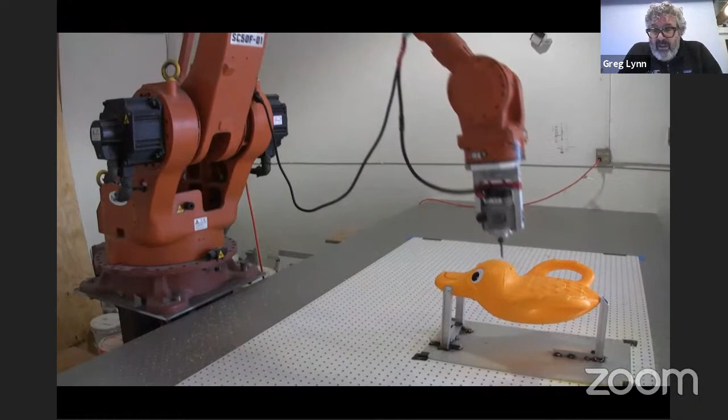Also, each one of these was intersected with another, and those shared curves of intersection were used to cut each piece with a CNC, a computer numerically controlled robot, so they would fit together. Then it was a very manual exercise of assembling all of these parts one by one.

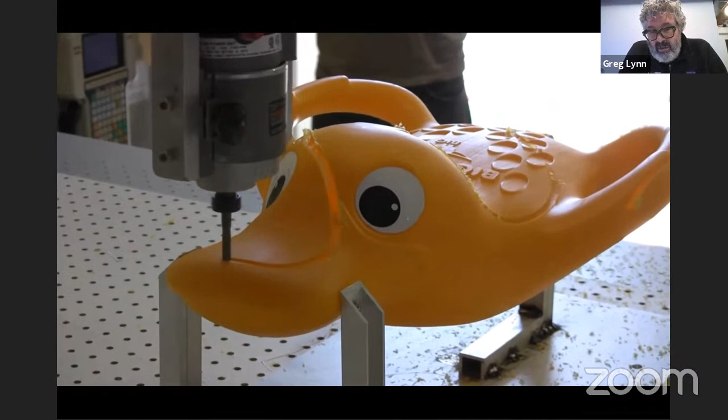My late father-in-law and my mother-in-law are both art historians. Irving Lavin, my late father-in-law, was a particular expert on Bernini. When I showed him the tables and furniture I designed, he said, oh, they have a spiral energy like Bernini's sculptures.

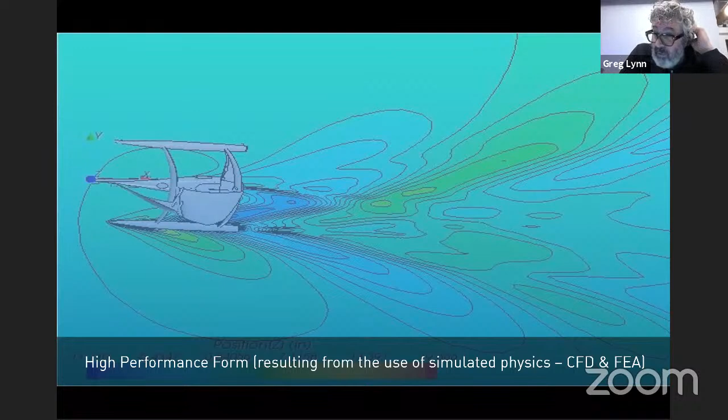What you see here is a simulation we did. It was very much like going back to the 1990s, where we would set up forces and let the computer, or actually a farm of computers, work overnight or sometimes even for a week or more, and then they would give us back results.

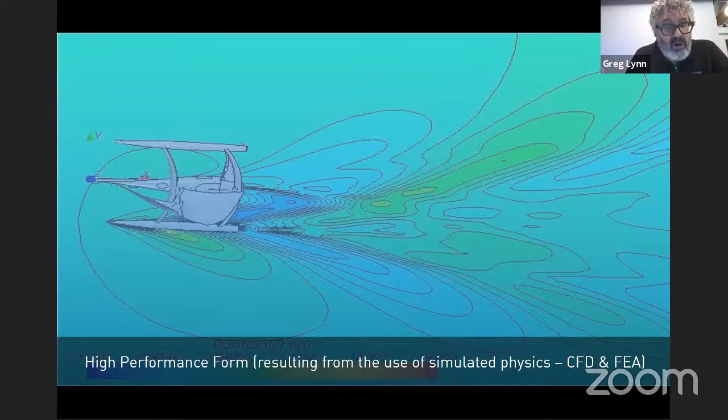This is showing a trimaran that I designed with Fred Karubla, moving through fluid, and those contours are showing the pressure in the water as it moves.

Here you can see a coupled simulation of air and water, where the white streamlines are showing the forces of wind moving over the sails, which are creating simulated drive in the boat. Then you can see the boat in the water, and where you see the red areas, that's where there's a very high pressure of water as the boat moves through it. And if you look at the curved line at the very bottom, that is a surface providing lift so that the boat slowly foils and lifts out of the water as it moves.

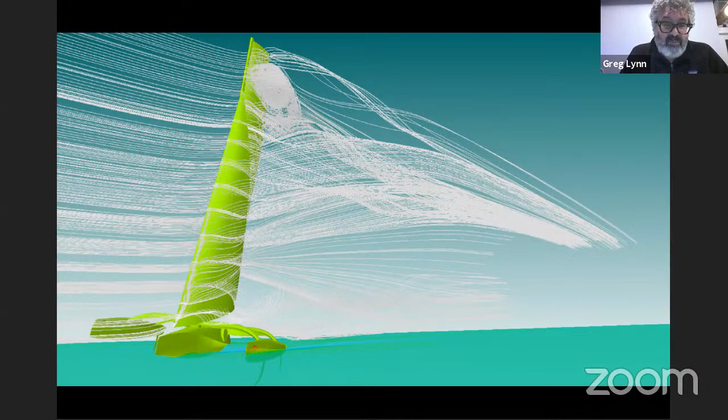So this method of motion is a completely simulated environment, where you can simulate force and form, so that the force of the wind and the buoyancy of the surfaces gives you feedback that helps you refine the performance of the object. So this is an animation of one of those simulations.

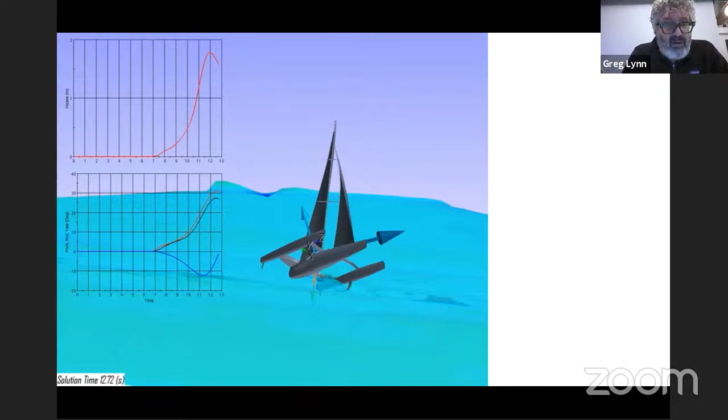In our simulation, there's nobody driving the boat, so almost every simulation ends in disaster of some form because nobody's correcting the boat as it moves. But it's telling us where we should place the foil fore and aft on the boat, where we want to produce that lift, and also where we want to position the sail and how much sail area we want fore and aft, so we know where the drive, the forward force, should be loaded. So this is a little bit showing a buoyancy study that we did.

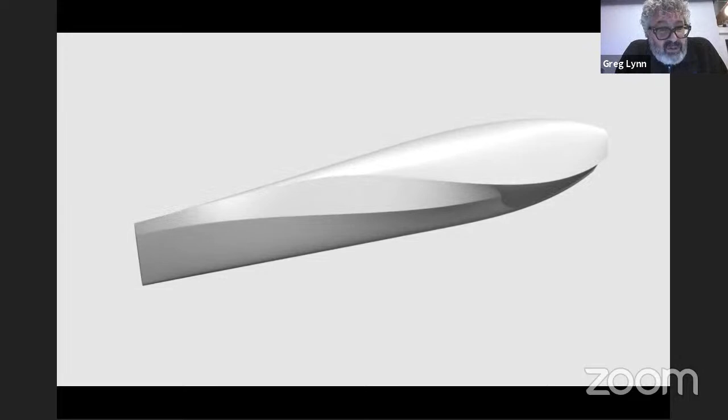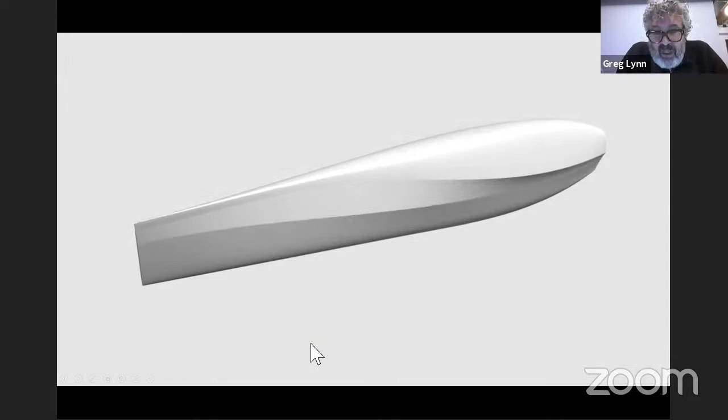I don't really think I could explain this perfectly over Zoom like this, I'd normally be pointing on the screen. But if you can see the mouse, you see a chine form here, which increases the volume of the hull in this upper section. You see a chine form in the back. Both of those lines are there so that as the boat flips over end, as the bow or nose of the boat goes down into the water, that crease...

So it looks like we have technical difficulties.

Yeah, it looks like it. It's amazing so far. Yeah, so far so good. We believe that he's reconnecting right now, so let's wait.

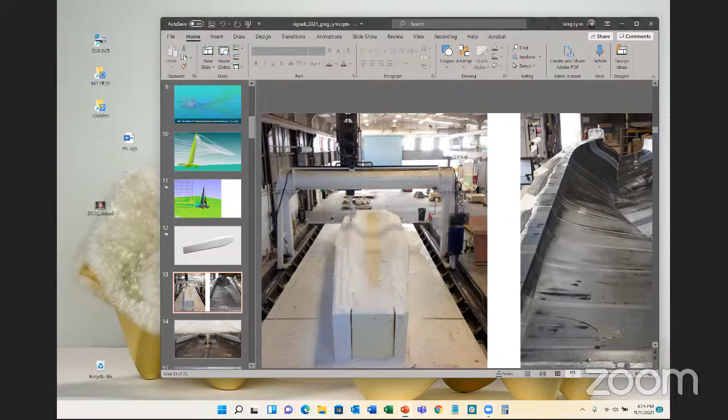All right, so, everything good with the screen again?

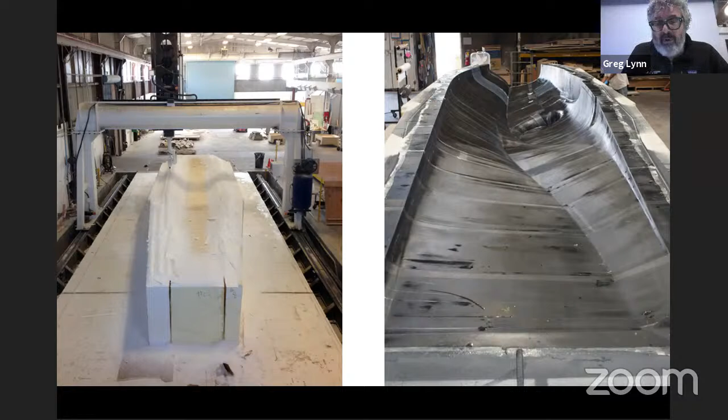Yes. Okay, so at any rate, what you see now is that same form on a giant CNC mill being shaped in foam as a mold on the left. And on the right, you see those curved chines that I was pointing out on the animation. This is how the boat was manufactured, with a robotically controlled mill that would carve the form, and then manually the carbon was laid up.

So all of that would have only been possible to design using that finite element analysis, which gives us insight into how...

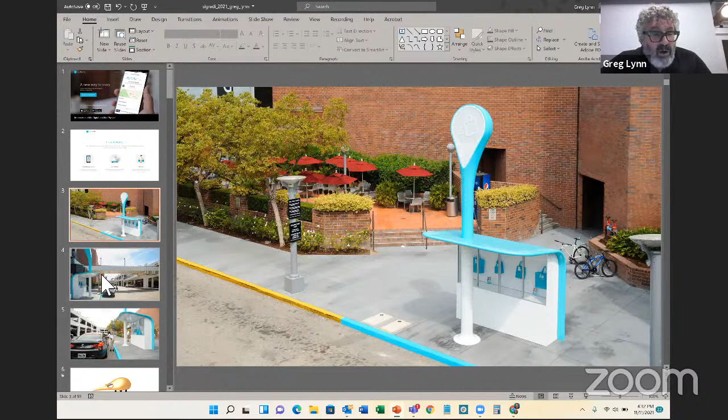Unlike Amazon, where you shopped on your phone and had things delivered, Curbside would record the inventory of an entire shopping mall, a Target, or a CVS, and you could buy the product, as you'll see here. A picker would get the order, go inside the store, pick your product, and then bring it out to this pickup location where a car would drive up and the picker would bring it out to the car.

This is shown at a shopping mall in Glendale, California. What's important about it is that the landmark, the curbside pavilion, had in the top of the mast a very high frequency Bluetooth antenna and Wi-Fi, and it would be able to detect when you were within a kilometer of the location.

Once you got within a few hundred meters, it would turn on the Bluetooth on your phone, and they could predict exactly when you would drive up. So the average time of a transaction was somewhere around 13 seconds on average. This was a kind of marker and a piece of technology and a little piece of architecture, which was at the intersection of the digital and physical - the exchange of physical and digital commerce.

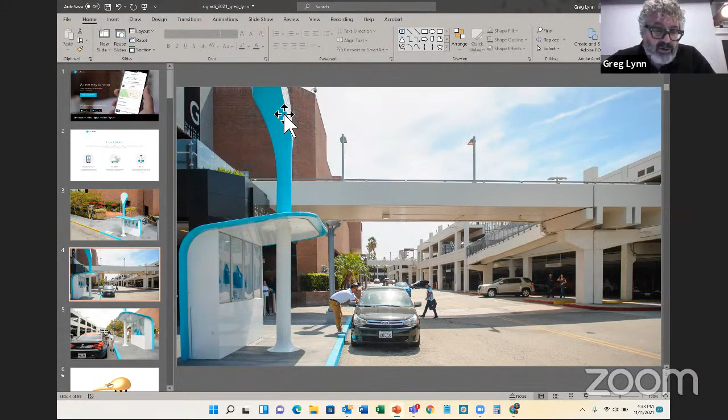In thinking about this, I learned a lot about how you literally connect an app with a building. In this case, the building doesn't move, but all of the geolocating and positioning within a mapped world was all happening between a physical structure and an app.

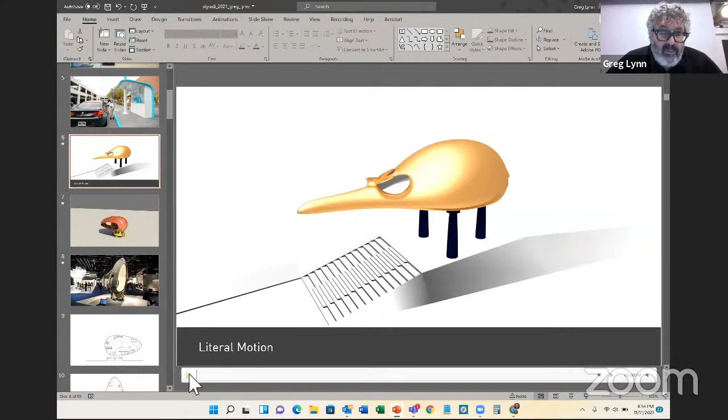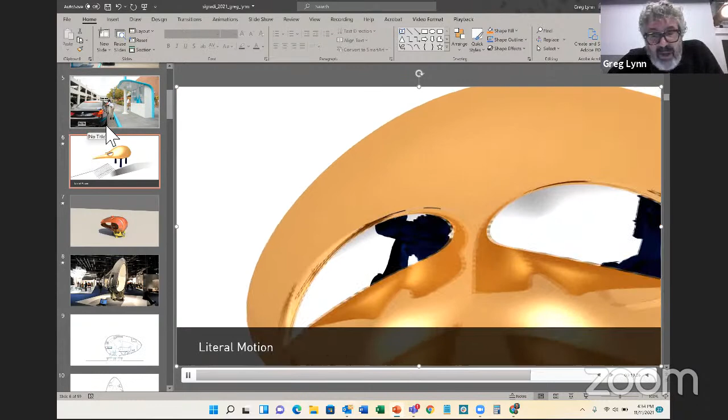A couple of years before, with Christian Moeller, we had entered the competition for the London Olympics, and Christian and I designed this moving pavilion, which was a carbon fiber dome. The proposal was for a carbon fiber dome that was rotated on a ring, and that ring was lifted up and down by 3 5-axis robot arms.

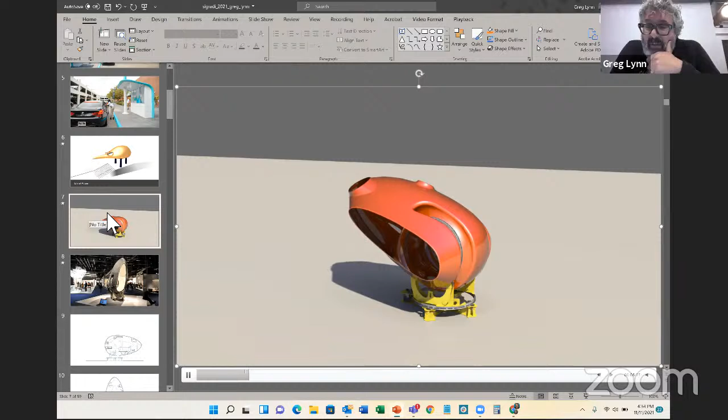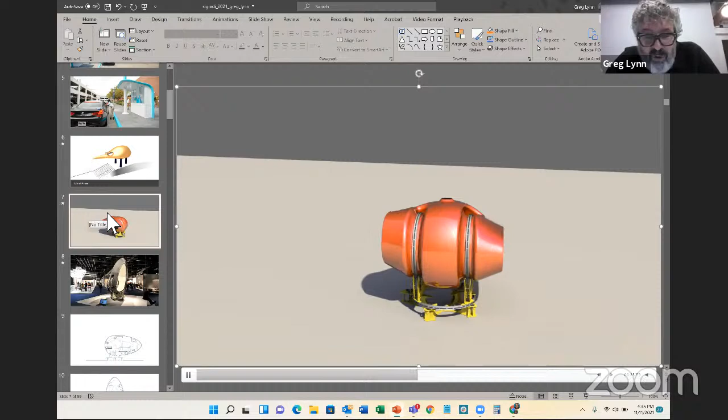So I went back to that idea of a building that moved, and for the Interieur Festival in Kortrijk, designed this tiny house that would be able to roll through 3 positions. You'd be able to occupy 3 surfaces of the house, and it would also be able to spin so you could change orientation. Everything you see in yellow was a simple little robot we designed to be able to move that domestic shell. Here you see at Kortrijk, kind of what we built.

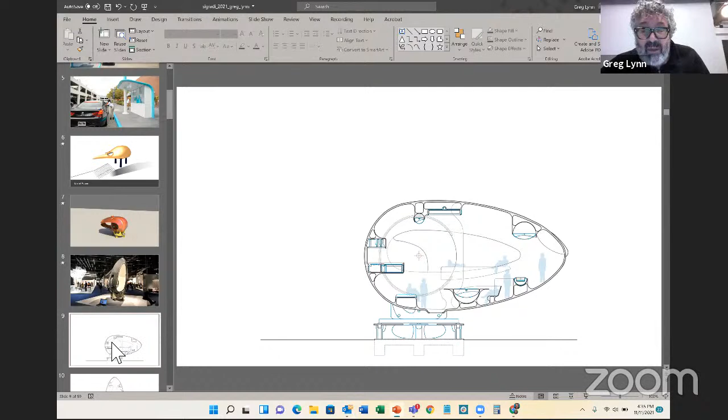This is a carbon fiber shell at 1/5 the size of the actual proposal. Everything you see on the base was the robot with the 3 motors, which would move it through all of its rotations. Here you see the different sections, a dining table and a couch in a living space, rotated here with the bathroom and the kitchen. And if you see, what was the table up here is now gimbaled.

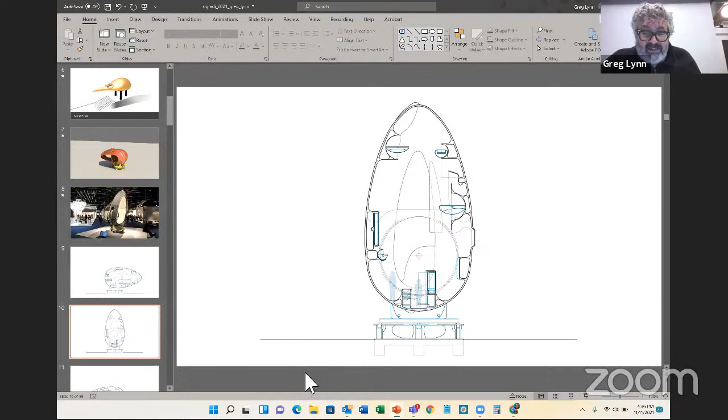So everything always stays level and appears and disappears. The top of this surface is a table and the bottom of it is a light. And then you can see it roll over for sleeping. Again, the robot at the base is what moves it.

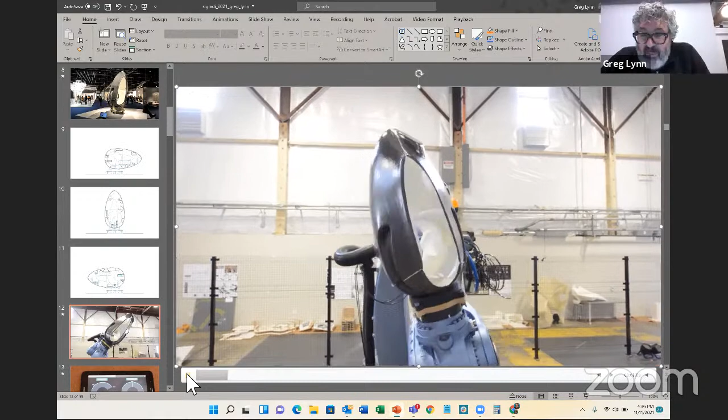So the first movement test we did was just putting it on a 5-axis robot and studying how the furniture would rotate and spin on the interior. You'll see the way all these pieces of furniture stay level all the time.

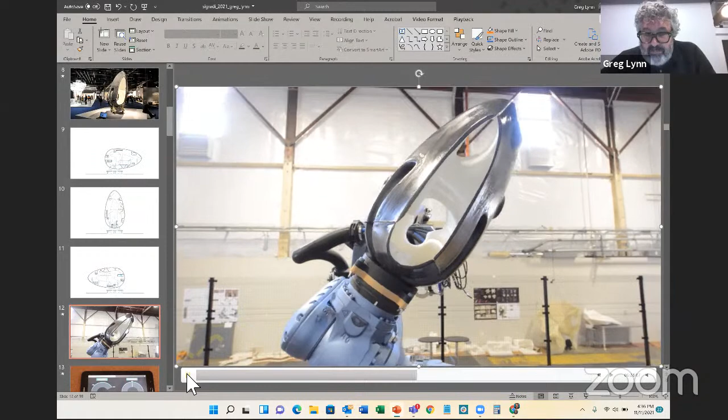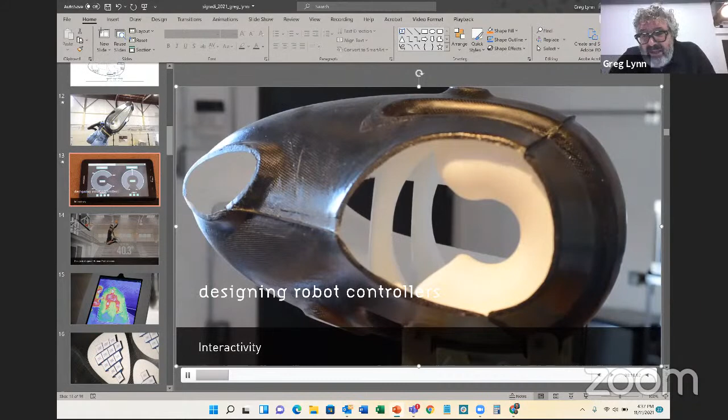And then here you'll see an app that we built to control that movement instead. So that was an app that we did that you could just download and immediately put the robot through all of those rotations, as well as having some preset positions that you could set it to.

And we wrote a very simple little piece of code that would control 2 of these motors and 2 axes, so that anybody could interact with the model.

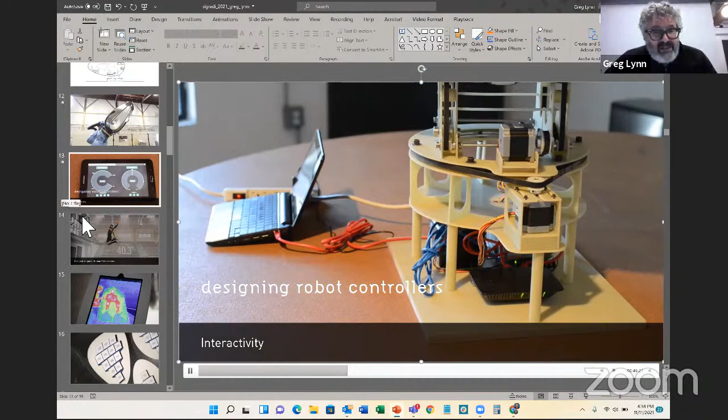This is a 1/25th scale model. That's a 1/25th scale model that's now actually at SF MoMA. So this connection of app to controller to machine was a next step in thinking about how physical things could move.

Soon, I think because of this project, I was approached by Nike to help them think about an intelligent piece of furniture, which could be controlled by an app. Here you see a photograph of LeBron James about to dunk a basketball. And the task for this chair was to give an athlete a competitive advantage by augmenting them with what we called a microclimate.

So we designed 2 generations of chair for Nike called the microclimate chairs. What they were there to do is, before a game, when LeBron James warms up, he's warmed up and ready to play. During the time between the warm up and when they tip the ball, it's several minutes, and during those several minutes, he cools down. Frankly, he's not able to perform at that level for 2 or 3 minutes into the first half of the game, and then 2 or 3 minutes into the second half.

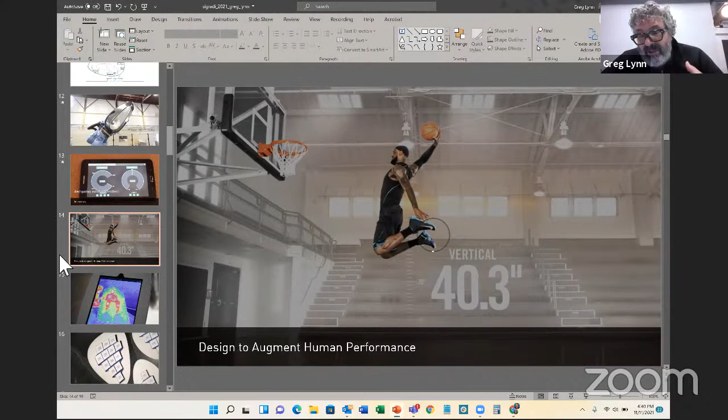So our job was to make a climate that would keep him warm and flexible and ready to play, so that for the first 2 minutes of a game, LeBron James would be able to perform, while all the other players who didn't have the microclimate chair would be at a disadvantage. The design of this microclimate was to give an athlete a higher performance.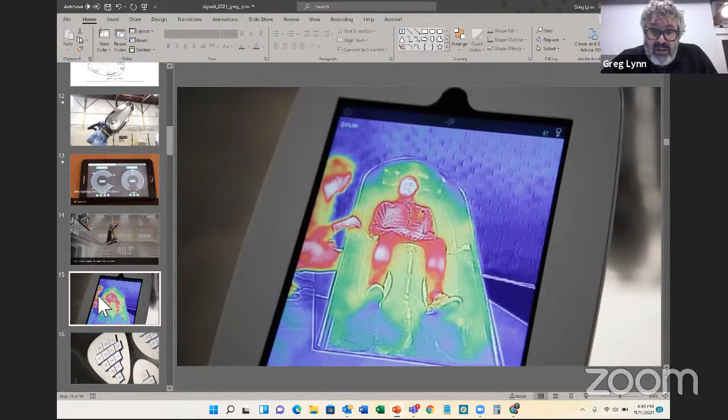Here you can see a photograph of the first generation of the chair using a FLIR heat camera, and you can see that different regions of the chair are at different temperatures. That's because we embedded a network of heating pads and a network of Peltier chips. The Peltier chips will either heat or cool on one side, depending on what electrical current you put through them, so we could heat and cool areas of the chair selectively to keep certain muscle groups hot and other areas cool. We also have an air channel that flows around the entire chair to blow cool air.

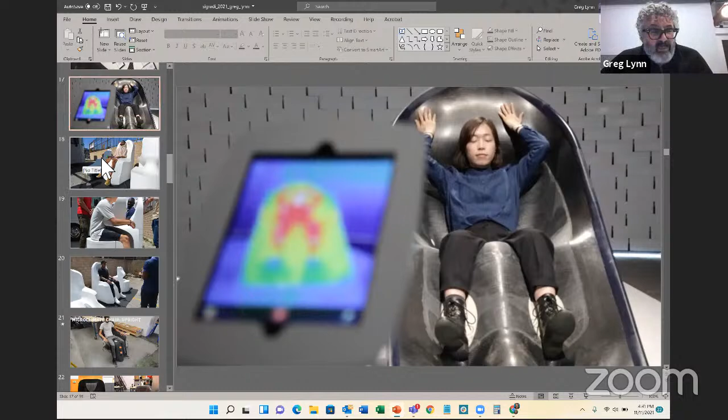In the second generation, you'll see we have more technology than that. So we got NBA athletes and tested them in different forms of the chair, trying to get as much of their body surface in contact with the chair as possible, and got feedback from the pro athletes on which positions they'd be comfortable in while on the bench or waiting for the game to start.

So here's the second generation of microclimate chair. You can see the patches of heating as well as the Peltiers. We built simple capacitive touch interfaces, so the athlete can selectively heat and cool the chair themselves.

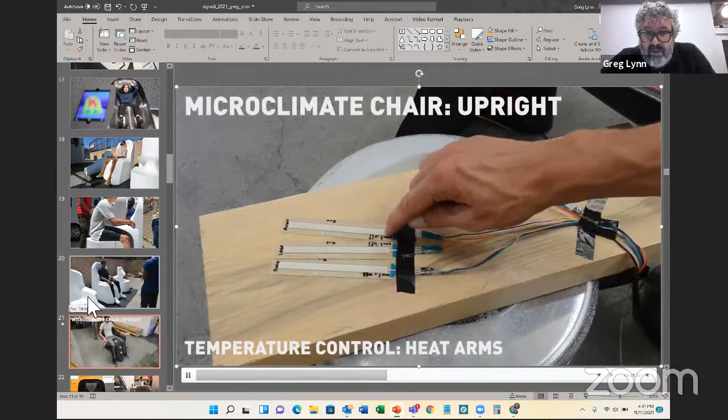We also put in cooling for the bottles they have to stay hydrated, and also scales that would weigh how much fluid they were consuming while they were in the chair, and a scale to weigh how much they were weighing during the game, so we knew if they were losing too much moisture or not, and how hydrated they were staying.

Okay, and then the whole thing was put in a Flyknit wrap on the top face. And then on the back face, you can see those machined aluminum heat sinks to keep them cool. And there you see two of the US basketball team players trying it out, the tallest and the shortest one. So this microclimate...

That entire silver base is all custom made boards and computing. It's full of wiring and technology, but all integrated into a thing which for the athlete was very simple and straightforward to use, with just 3 sliders and 1 ring for the fan. So for me, this was the beginning. I mean, I would call this chair a robot only because it was changing climate for the person sitting in it. But it was the beginning of me thinking about how people interact with transforming robotic technology.

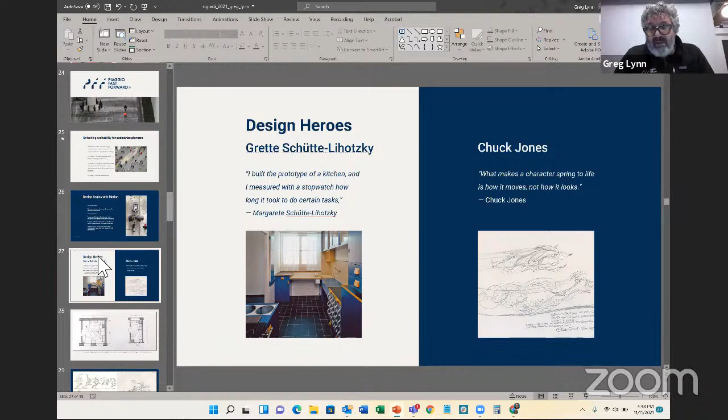And Grete Schütte-Lihotzky was an observer. She built a kitchen, took a stopwatch, and measured how people moved around in the kitchen. And with that study and observation, optimized the kitchen and actually made it smaller, but more functional and pleasant.

So here you see on the left, Schütte-Lihotzky's kitchen that she measured originally. That's the 3.5 meter square one. And then on the right, you see how she recorded those paths and then optimized those paths of work in the kitchen to make the kitchen more comfortable. So she was a person that was doing motion studies and analysis. We do something very similar at a much higher precision with higher technology, but the same idea.

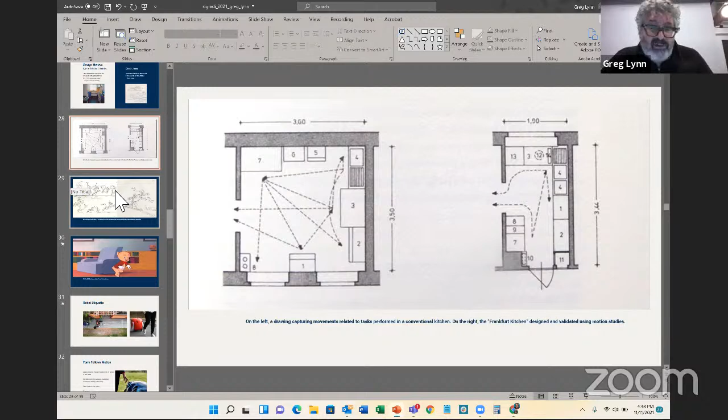Here you see a Chuck Jones sketch, where on the left you see the character always has a curved arrow running through it. So Elmer Fudd always marches with his back bent and his hat forward. Bugs Bunny is always leaning forward, kind of falling as he walks. Daffy Duck also falls as he walks, except his head moves backwards and forwards. Pepe Le Pew bounces by making these arches.

Every one of these characters had a signature that had to do with how they moved. These curvatures were the basis for that movement, much like I would have thought of a spline as a designer. So our whole team read Chuck Jones books and watched his characters. Porky Pig's character isn't what he looks like, it's how he bends and moves. Same with Foghorn Leghorn, the way he struts.

In fact, Gita robots are more like Tweety Bird, the way Tweety Bird leans forward to take off and leans back to stop. So our first task was designing the motion and etiquette of how the robots move. We do that so they're good citizens, but also so bystanders can look at one of our robots following a person and understand that robot is taking off to follow them, and that the robot belongs with that person. So again, we started with the motion.

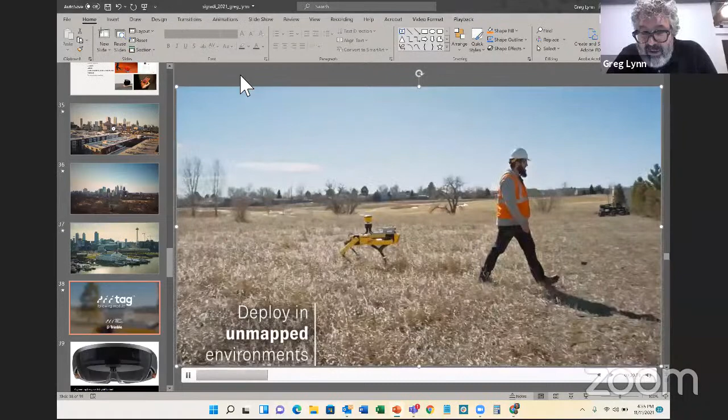So this is a proof of concept that we're industrializing right now, that we did in collaboration with Trimble and Boston Dynamics. You can see now that instead of moving a spot robot with a joystick, which is very complicated and unnatural, you can just touch one button and it follows you. And then once it's followed you on a path, it can then reproduce that path by itself.

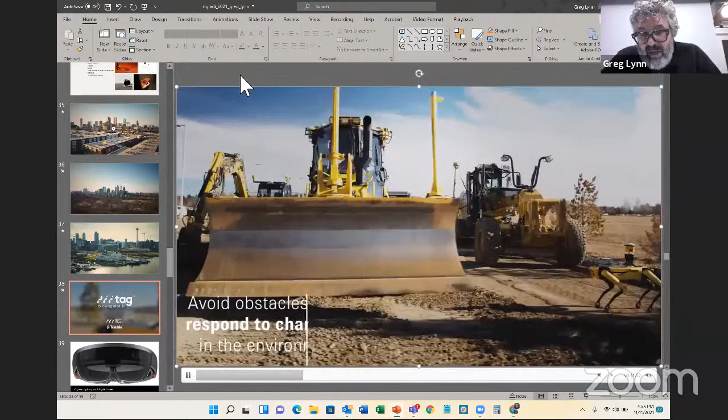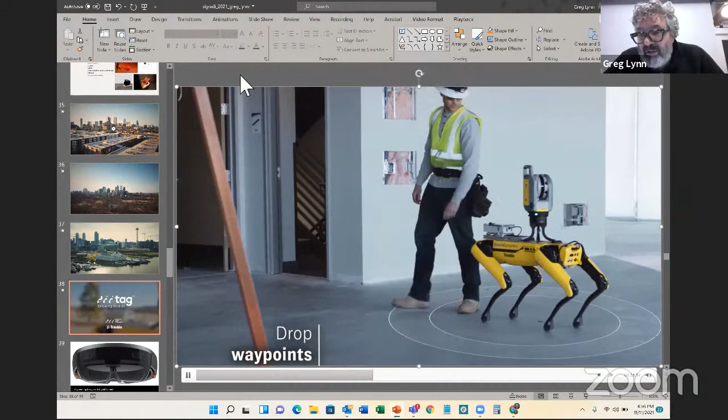We've done this both outdoors and indoors. Here you can see also that for automating tasks inside a building on a construction site, a totally untrained person can drop a point, walk, drop another point, and then we can control the machine to reproduce that path over and over again. And also, by the way, this is incredibly safe. So we can bring both efficiency and safety to workers and people that don't have training in robotics.

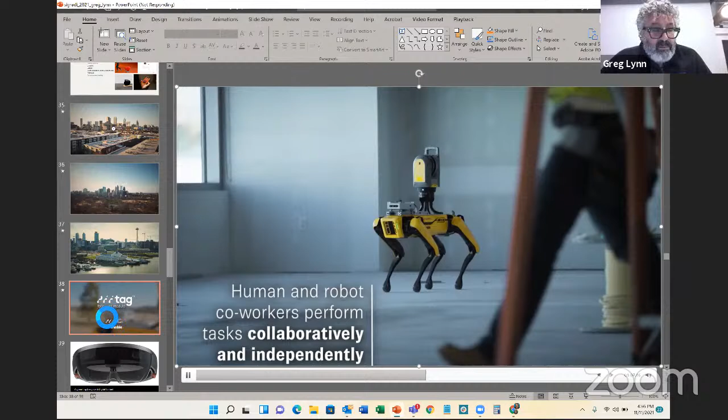All right, so almost at the end here. The last thing I would show, I did some work with Microsoft and Trimble on the HoloLens, where we were augmenting physical models with digital content.

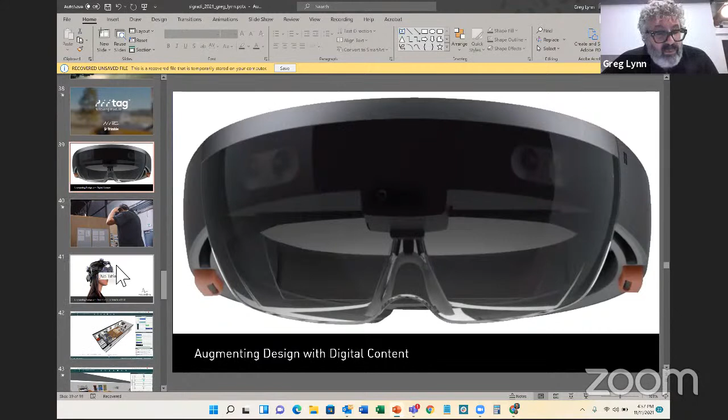But what I really was excited about is a collaboration we did with Neurable, who builds a dry EEG headset, meaning that it measures your brain waves. And this is the first use of augmenting a design with data that comes from a brain-computer interface.

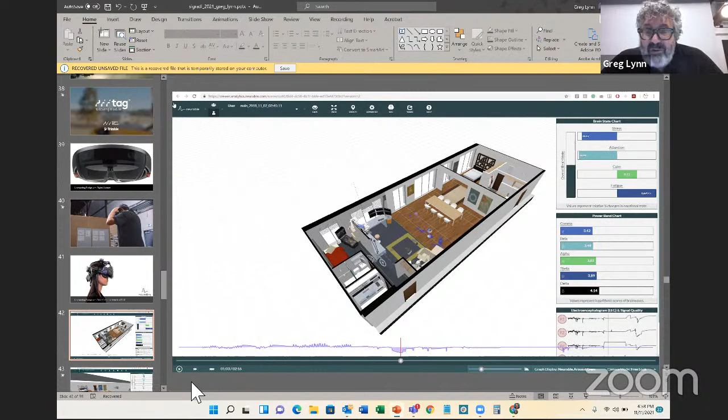So here you see, this isn't what we designed, but you see the environment that Neurable was using. It's a virtual environment, and you wear a goggled headset, and it records your eye movements as well as your brain activity. And it gives you feedback on what that brain activity is as you're looking at different things in the building. So here is a video of that.

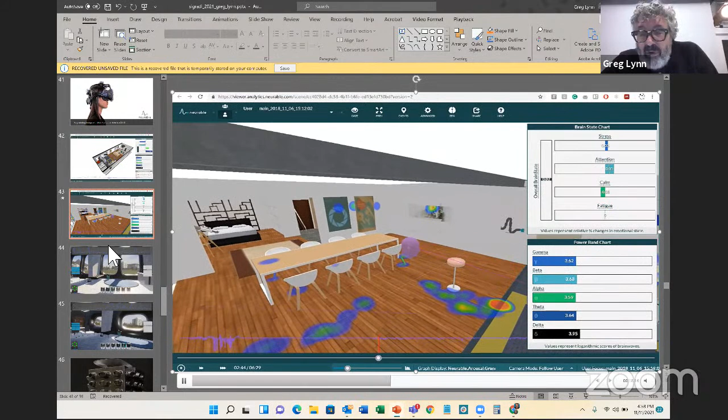Again, not what we designed, but what they were using. You can see that purple line is showing where the person is looking in that three-dimensional scene. And then those heat maps are the things they've looked at. And then on the right, you can see the emotional feelings associated with those things that the person is looking at.

So what we did is we gave Neurable a 3D model and asked if we could have 30 people walk through our 3D model, and we measured their happiness and confusion and frustration and relaxation to see if they were understanding where to move.

And what's also, by the way, you move around in these scenes just by concentrating. There's no joystick or anything like that. So we could see where people were looking to move. So we recorded both the movement through the ground floor to the second floor to make sure that we were understanding that what we were designing was clear in terms of movement.

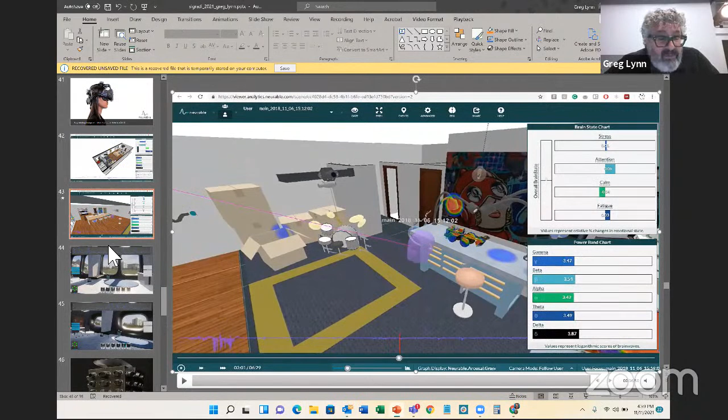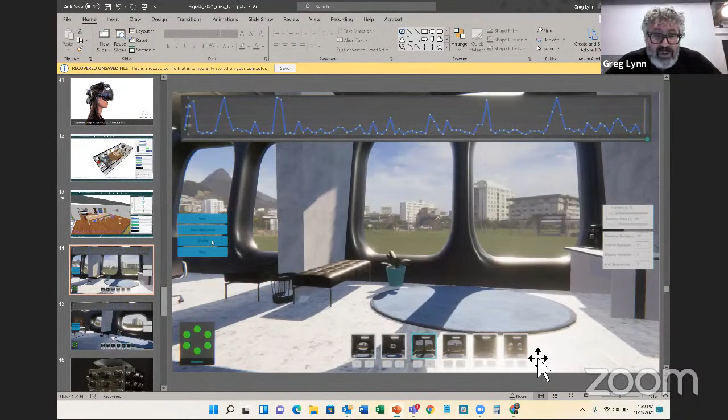We also had 6 different options of windows and apertures. You can see down here at the bottom of the screen are 6 different types of window pattern. We measured the emotions of people as they walked through our virtual 3D model to the different apertures. I have to say that the windows we were designing turned out to be the ones producing the best electrical feedback from people as they were walking through, in over 80% of cases.

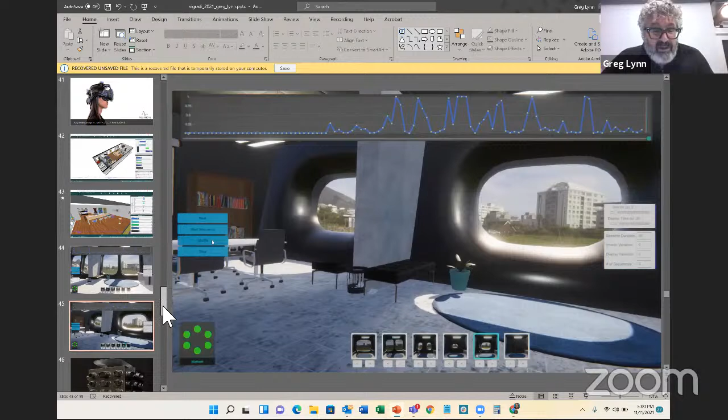But it was kind of amazing to have a 3D model, and instead of making fly-through animations, get electroencephalograph data from 30 people that had moved around in the building and see which versions of the building they unconsciously or consciously preferred. So anyway, for me, this was similar to the computational fluid dynamics used to optimize performance of a foiling trimaran. This was an EEG readout of brain activity to help optimize the design of a building.

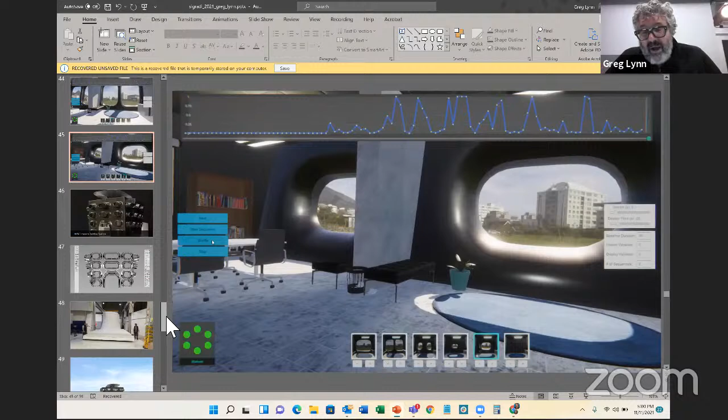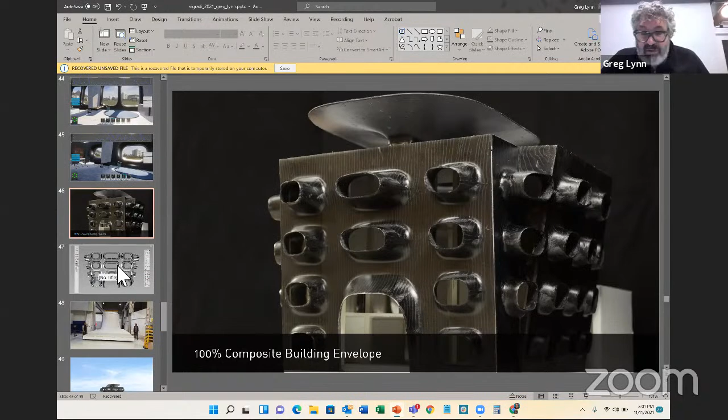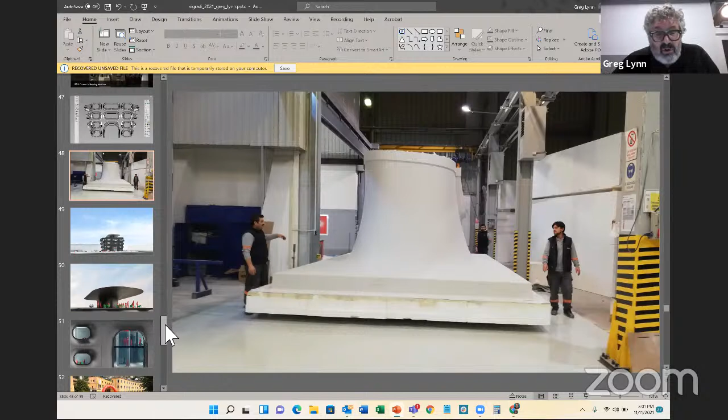And this is an office building for a company that weaves composite fibers in Manisa, Turkey, called Metyx. I won't go into the construction of the building so much because we're already at 5, but you can see these apertures and openings. The building is getting ready for construction, and here is one of the molds we're using.